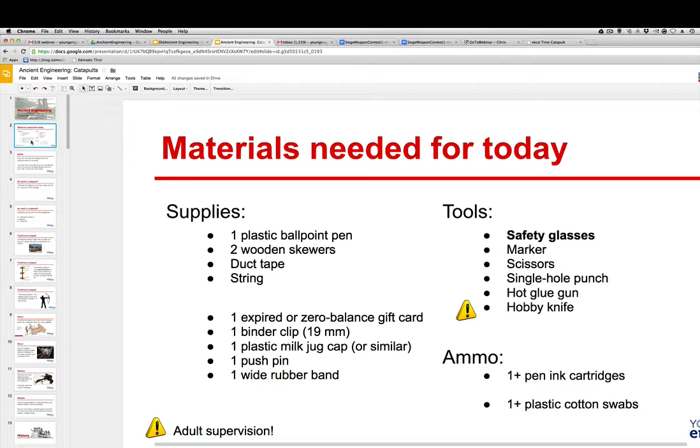If you don't have the materials from this slide right at this moment, don't worry. I will be putting out the PDF of this as well as you've got your book. You'll see different objects in there you might want to build. Okay? Now, we'll make sure this video is being copied. It's being copied right now as we copy our videos. And you should be all set at that point.

You can rewatch it. The goal of a catapult is to fling a mass in the air, mainly to inflict damage. That's what the goal of a catapult is. So we're going off this. I've got a question here. Let me see what the question is before we get started. Let me pull this up. Move that down here.

So we just build from the book? No, we don't just build from the book. You start with one from the book. We're going to look at fit and finish. That's the minimum you could do. What we really want to see you do is to improve it. Come up with something. Use better materials. Use lighter materials. Things that look better. All right? Then everybody's going to submit pictures of them, and then we'll see what you think. All right?

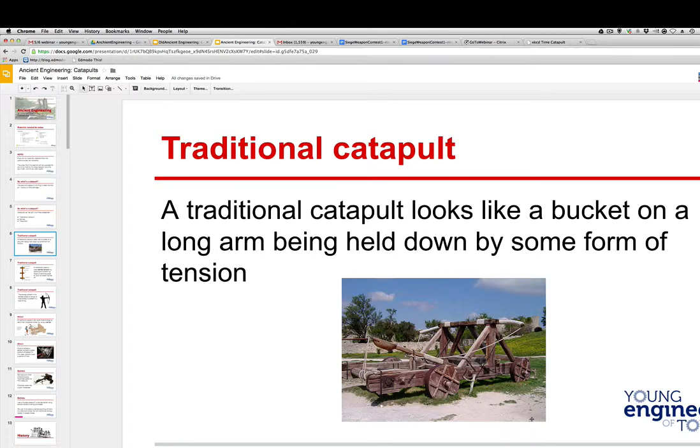So, catapults can be split into 3 categories: traditional catapult, ballista, trebuchet. A traditional catapult looks like a bucket on a long arm being held down by some form of tension. So that's what that bad boy looks like, right? Just like there. Okay? A traditional catapult uses stored tension by twisting and stretching ropes or bending wood to vault its mass into the air.

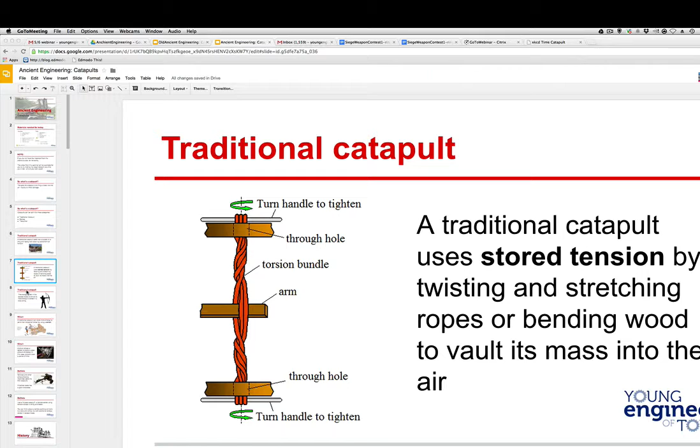Okay, so I'm just checking on IDs here. So here's the handle to tighten it. You've got this through hole. It's going through this hole. Your torsion bundle, it might be horsehair for that matter, and the arm that you're going to be launching off your catapult. And you're tightening it on both ends. But ultimately, it works a lot like a bow does. The energy stored in the twisted rope is similar to how energy is stored in a bowstring.

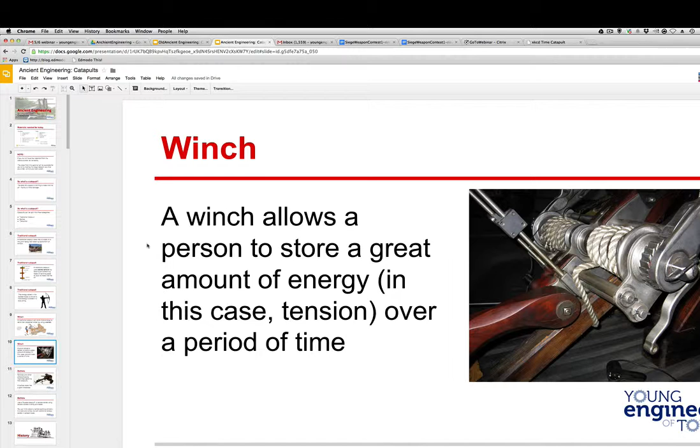Again, it works like a bow and arrow, but now, besides your arm muscles, we're using twisted rope. With the twisted rope, you are using your muscles. You've got to use your muscles to turn it right here, and you're going to store that energy. But now we're using a simple machine.

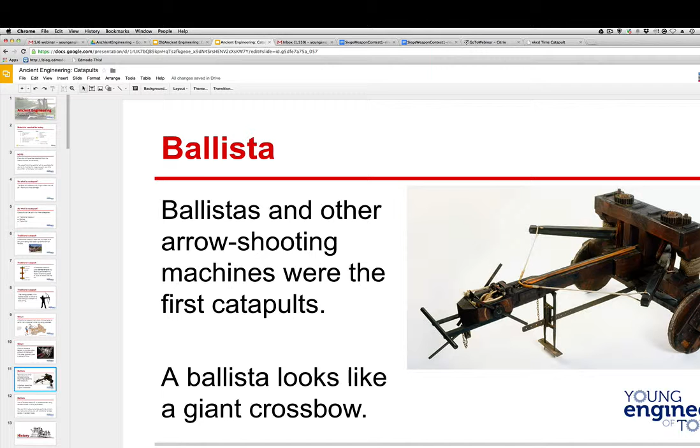On this bow, until we started making compound and all these crossbow things you see made today with levers and everything in them, you didn't have that. I was always surprised. I'd pull up my dad's crossbow, and it was amazingly hard to pull back. I never realized until I started having to do it. Okay. So, it's using those things.

So let's look at the history of this. Romans, here they go, ready to fire off. Humans have limitations. We can only lift so much, can only throw so high. By increasing the energy stored in projectiles, you can increase the amount of damage they will inflict. So what all that's saying is, if you take this projectile and you put a lot of potential energy in it, well, how can you do that?

Well, one, you can twist the ropes and build up elastic energy, or you can take it up higher and higher. Just think if I took a ball and I lifted it up 10 feet, dropped it on you, then 100 feet, and then 1,000 feet. You would see that you get more energy up to a point. Then after a while, the friction of the air starts slowing it down. It doesn't get any faster.

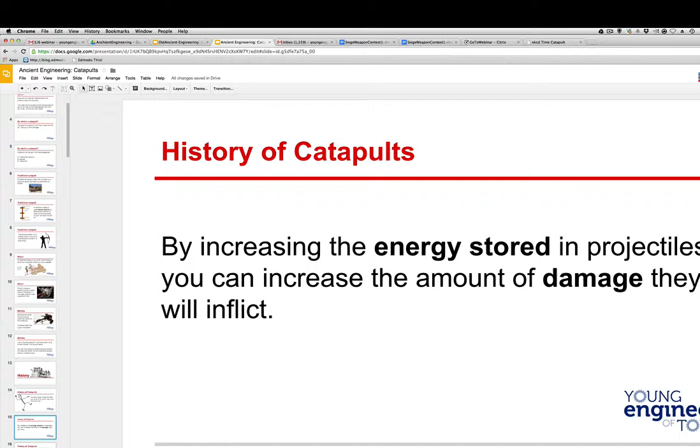So if you're a human being, you're throwing things at other human beings, but you can only throw it so high, so far. And so we're going to start adding equipment. Now, when it's military, we tend to spur it on even more. All right? We get more energy. The threat of your city being sacked and your family being harmed drives great military advances, which aren't always the greatest thing, folks.

But for example, if you look at the beginning of World War I and what the planes looked like, and by the end of World War I, it was a huge improvement in flight technology. Huge. It's enough so by the 1920s they're starting to investigate the jet engine.

All right. People we've got here. I'm checking my numbers. Okay, great.

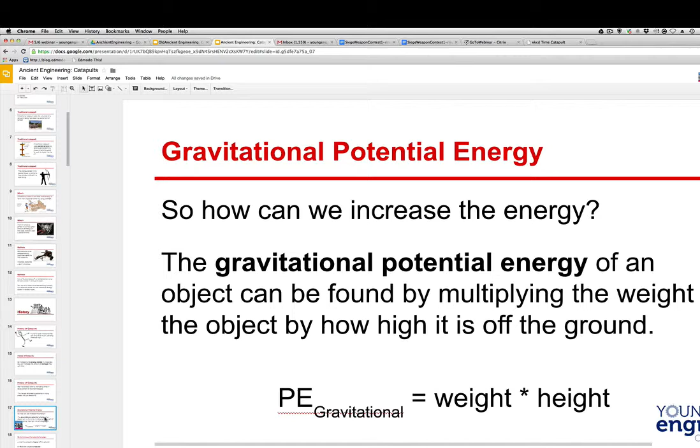So then, how can we increase this energy? Now, I don't care that you know this next formula, but gravitational potential energy basically says weight and height. That's a fancy way of saying you get more potential energy the higher up you have something and the heavier it weighs. Well, you get the projectile off the ground, make it heavier. I think if you take a half-ton truck and take it 2 miles off the ground, it's going to hit you. Make it a 10-ton truck, and wow, it's really going to hit you.

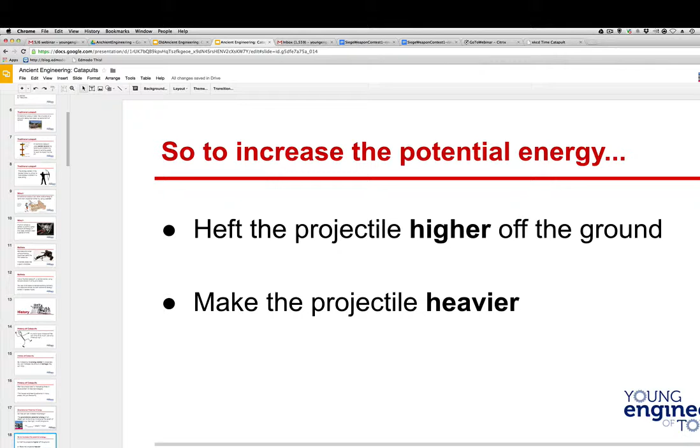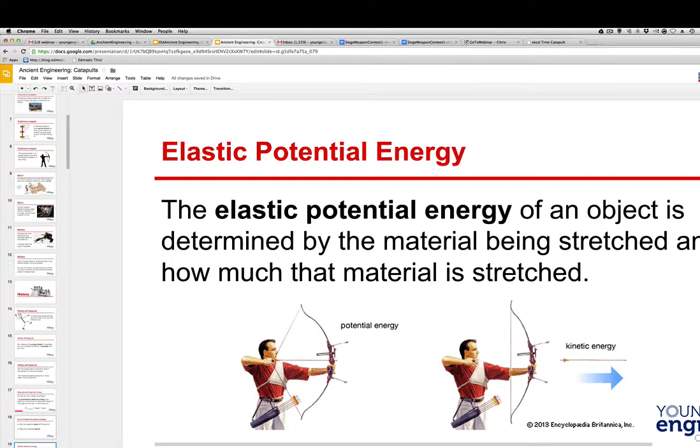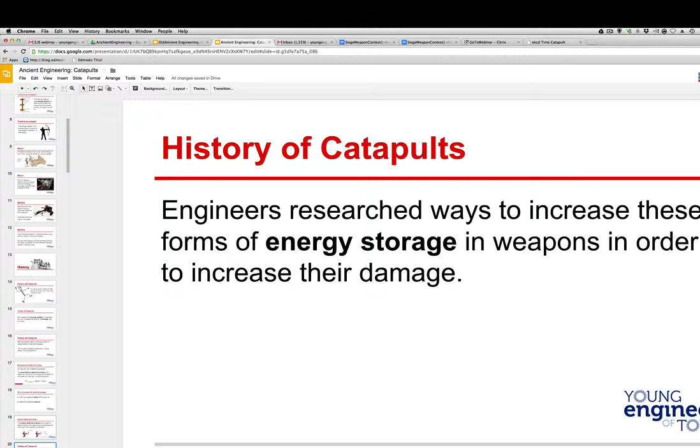All right, now on a bow and arrow, it's elastic potential energy. That's how much it's stretched. All right. Engineers research ways to increase the forms of energy storage in a weapon in order to increase their damage. So engineers researched ways to increase these. So what they did is they even put together a think tank.

A think tank is where, and we have them today, we get people that are pretty sharp in their fields. You put them all together and you say, okay, come up with a better way to make agriculture better in the United States. A better way for our economy to run. A better way to improve schools. A better way to design better weapons. They had this 400 years before Christ.

Put that in perspective. 400 years ago for us was the 1600s. We're just getting the first colonies in the United States. So let me restate that. That was 400 years before Christ when this was going on, so that was almost 2,500 years ago. But I just wanted to show you the time between when they had this think tank and when Christ was born was the same amount of time as since we were just forming colonies in this country. Sometimes it's hard, 200 BC, 100 BC. It sounds like a long time ago, but it is a big difference.

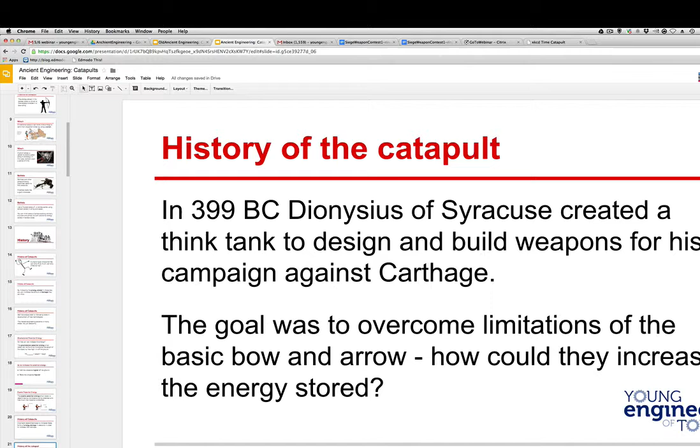All right. So they started thinking, well, what can we do to get better weapons? How can we make them stronger, more powerful? So let's look at potential energy and look at some of the things we can do. We're going to play this game.

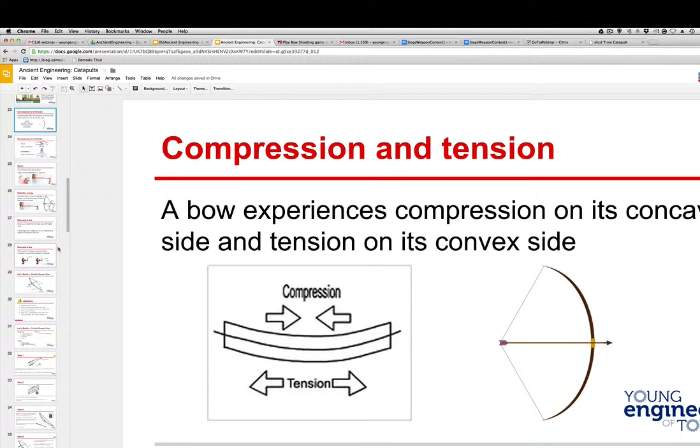So by now, I hope you're finding out pulling the bow back, that angle all matters. Which, by the way, they got very good at sighting these things in. But if you look at a bow, it's both compression and tension. The outer side of the bow is undergoing tension. This is like on a bridge, frankly. The inner side is going under compression. And you see it right here, compression, tension. Tension's a pull, compression's a push. And we're going to come back to that in a minute because we're going to reinforce this.

So how do these forces store energy? Well, imagine a loose rubber band versus a taut rubber band. You use your arm to pull that rubber band back. It's now storing that potential energy of you pulling it back. And same thing as when a bow is drawn, basically. All right? It's doing the same thing in both instances.

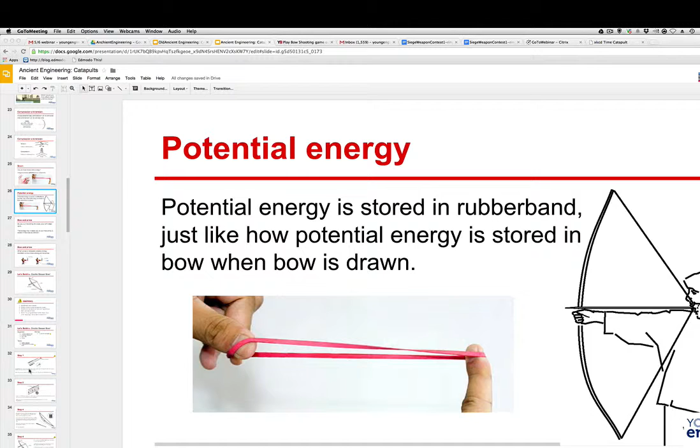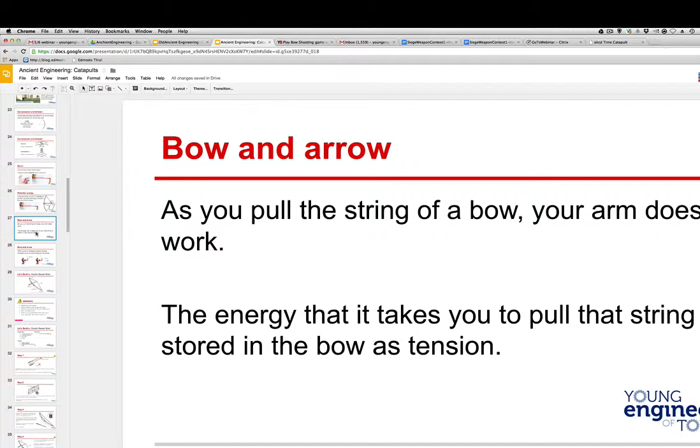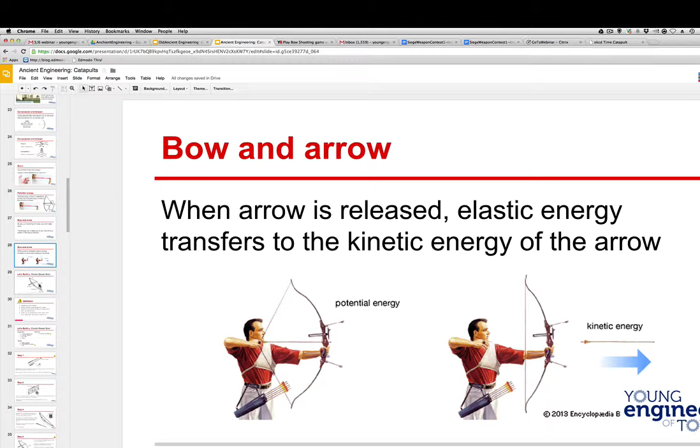So as you pull the string of a bow, your arm does the work. The energy it takes you to pull that string is stored in the bow as tension. So all that energy from your muscles goes into the bow as tension. So that elastic energy that you transferred by pulling back is, when you let go of the bow, transferred as kinetic energy into the arrow. And there it is.

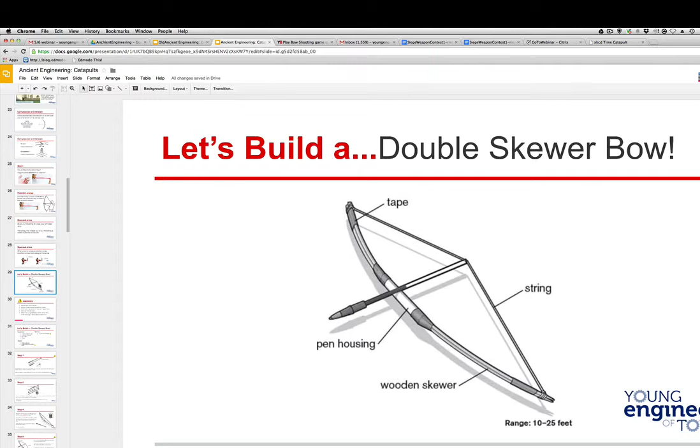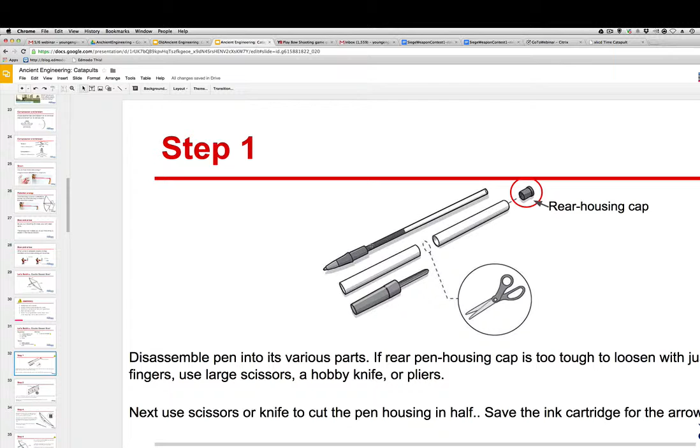Now make sure you always wear eye protection when you're doing this, all right? So one you can build right now, I'll show you, is this bow and arrow. You can take a pen, cut it in half, and this is going to be part of your arrow. This is really just for reinforcement. And then you're going to put the pen casings over some wooden skewers. Be very careful. Do not shoot this at cats. Do not shoot this at your little sister. All right? Could hurt somebody.

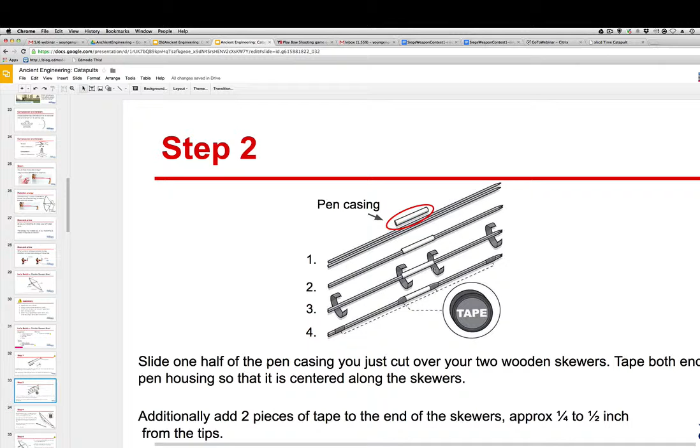Then tape it around like this. So this is going to make part of your bow. And watch. Then you're going to bend it like this. And then this will be an arrow. You can use a rubber band here too.

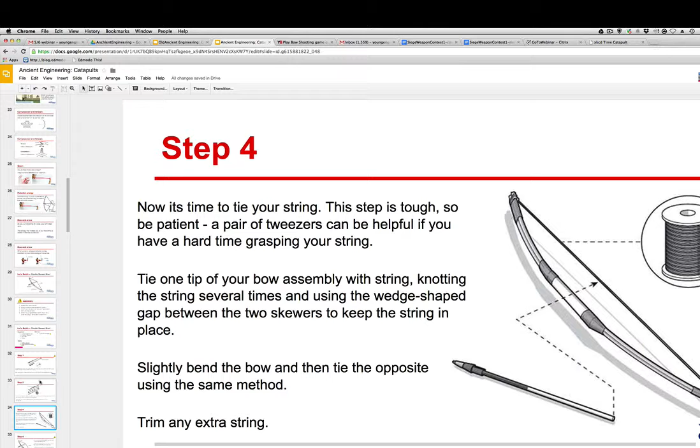All right? And then it's going to look like that ink cartridge. You're going to have to build it just like that. You know, and be careful, those ink cartridges have been known to break. All right.

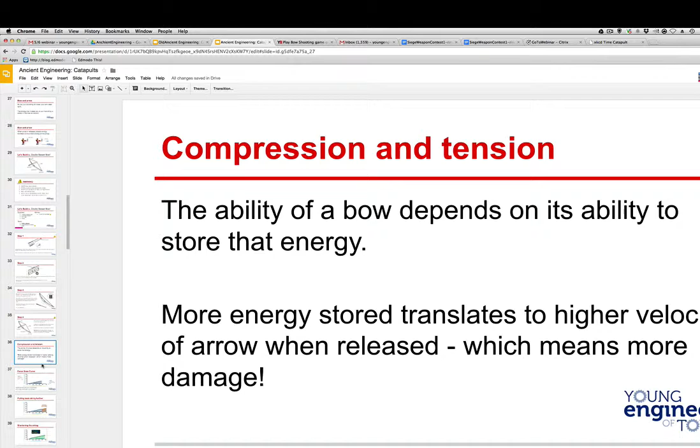The more energy you can store in that bow, the more powerful the bow can be. All right? So let's look at the elastic energy in this bow. It goes from 0 to, say, 30 right here. Okay? Now, the x-axis is how far you pulled the bow back. The y-axis is how hard you pulled it. Okay? This is how much force your arm is exerting. This is how much elastic energy you store.

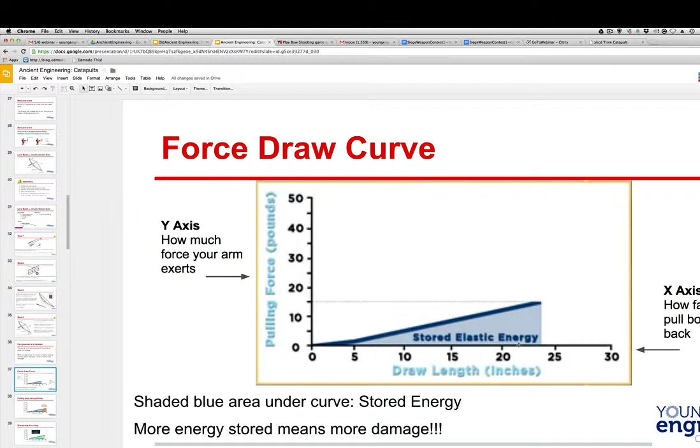Watch when you just pull a little bit farther. By just moving a few more inches, you get a lot more energy. That final few inches is huge. We see that with model airplanes. If you wind up the motor on a rubber model airplane, the rubber will break at a point. So let's say that breaking point on average is 400 winds.

You would find that most of the final 20%, 20% of 400 would be 80 winds. So from 320 winds to 400 winds of break is when you get all your thrust. If you really wind it up that hard, it's going to go way up high real quick. Not long, but it's going to get a lot of thrust in this last little bit here.

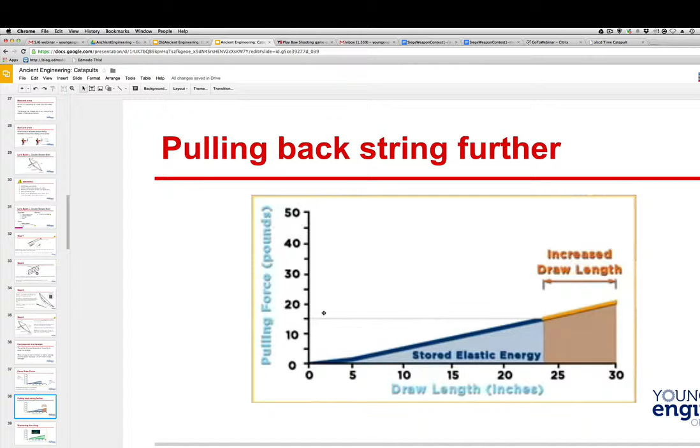That's why with a rubber model airplane, if you ever let one go and fly it, if you fly just a few feet and it crashes, then you pick it up and try to throw it again, they don't usually ever fly very well because you've lost a lot of that final 20%, all that thrust.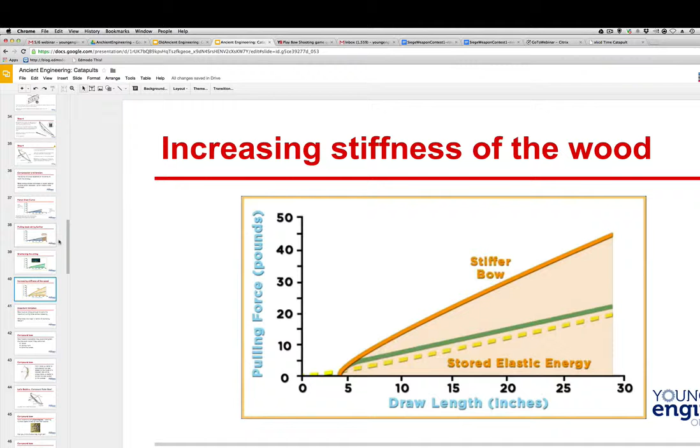Now, again, you also have to be pretty strong. Back in the day, bowmen had to be very strong to be able to pull that bow back. You had to be strong enough to pull it back and be able to breathe and release it. The bow must be strong enough to carry the maximum pulling force without breaking. So what can we do to do that? Well, pretty soon, if you just had a piece of wood, it would break.

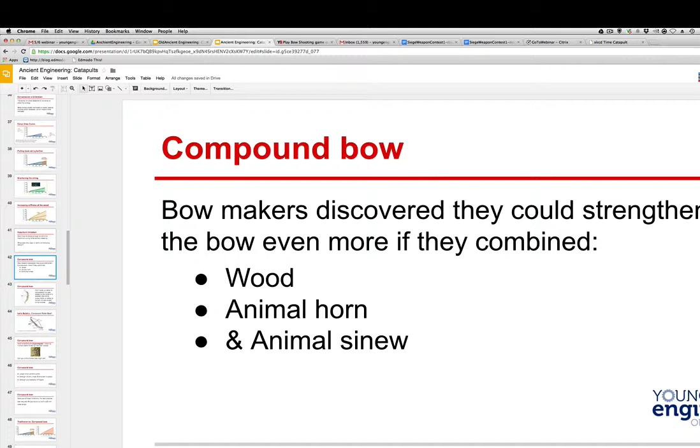So they would take wood, animal horn, and animal sinew, which is, think of that as the tendons, the connective tissue in an animal. And what they would do is put the three things in here. Here's part of the horn on the inside. Here's the wood of the bow. And here's the sinew on the outside. So those three things together allowed the bow to be bent, more energy could be put in the bow. You could pull it harder, hold it longer. And it made a big difference.

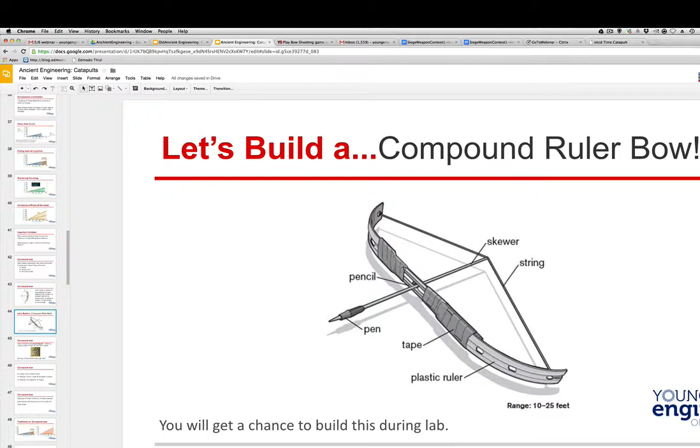And so here's another example of a bow. You can use a compound ruler bow made of multiple materials. It's using a plastic ruler and tape, and you might get a chance to build that in lab. Now, the limits are physiological. In other words, the bows were no longer breaking. So the bows could handle you pulling it. Problem is your archers couldn't pull them anymore.

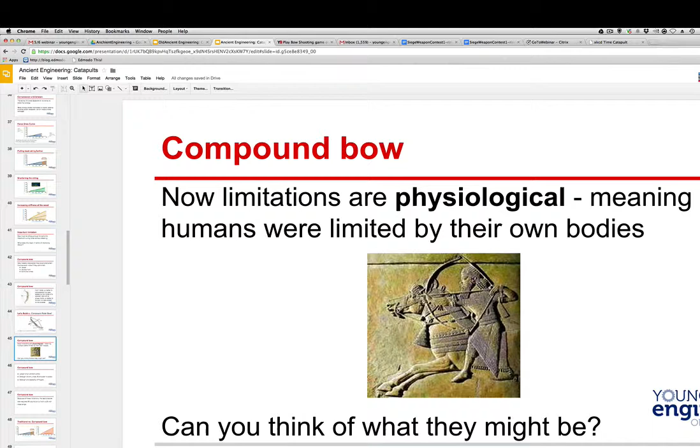All right? And that was limited by the length of the archer's arms, their upper body strength, and the strength and dexterity of their fingers. That's why generally most bowmen are males, because males, generally, there are plenty of exceptions, have more upper body strength.

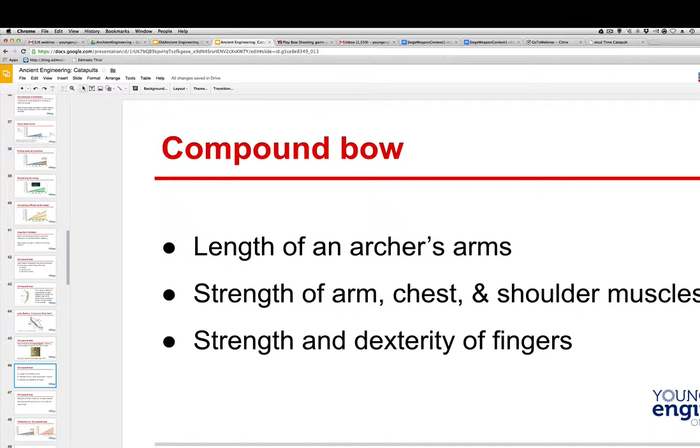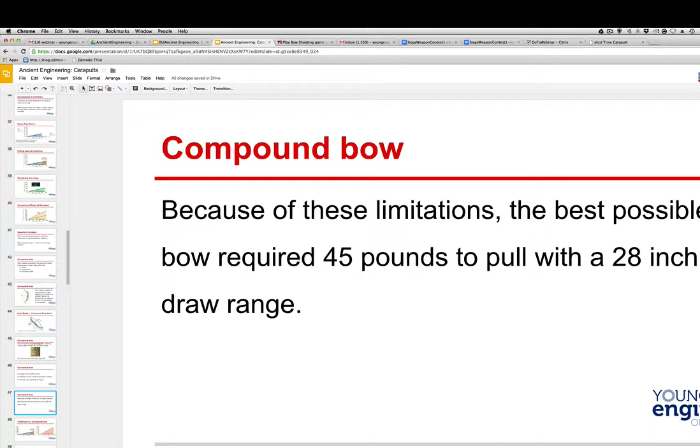There's plenty of women that have the upper body strength to shoot bows, or women archers that compete at that level, the whole nine yards. But I'm saying back 1,000 years ago, it wasn't so much. All right, because of these limitations, the best bow required 45 pounds to pull with a 28-inch draw length. So that's like 2 feet, 2 3/4 feet, 45 pounds. And you really could get a lot of...

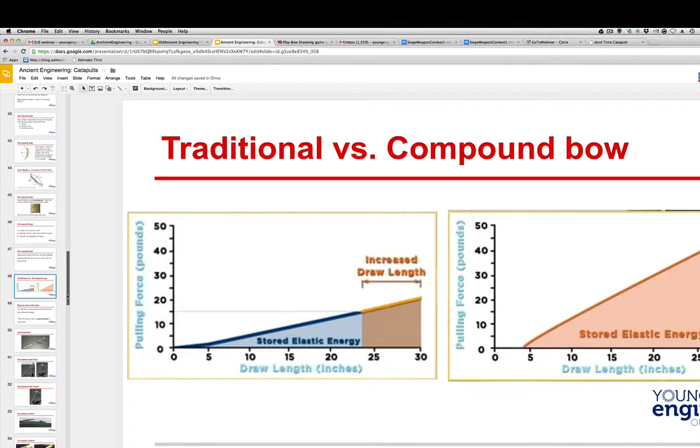So then comes the fact, okay, we've made our bows out of multiple parts that won't break, can store all this energy, but we can hardly pull it ourselves anymore. So what they did is they developed the gastrophetes, or belly bow. We saw a little video of that last week, remember? So this bow goes like here, and you use this to shove the arrow into it. We'll show you in a second.

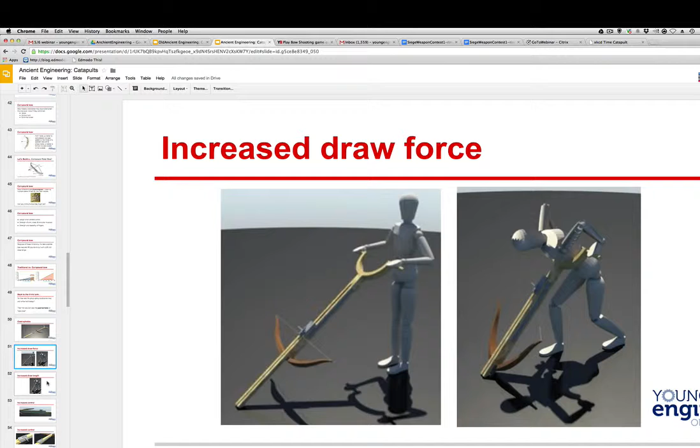So there's the guy, he puts it on his waist, and there's the front of the bow. Let's go back. This part here and this part. He uses his body to cock it, shoves this into it, and locks it down. See how it is right there? And forces it back on that. And then once they were set there, you drop the arrow in there. See, the arrow goes right into here. And now you're ready to launch this bad boy.

And by having this iron mechanism too, if it's getting so powerful, so much energy, your hand really can't hold it. By having that iron mechanism, you can precisely launch it right when you want it. Okay?

Now I've gone pretty far here. Any questions on what we've covered so far? Sorry about that. Okay, and everybody's talking about how much they were shooting it. Great. But any questions on what we just did? Raise your hand if you have a question. Okay. All right, let's go on to the next one.

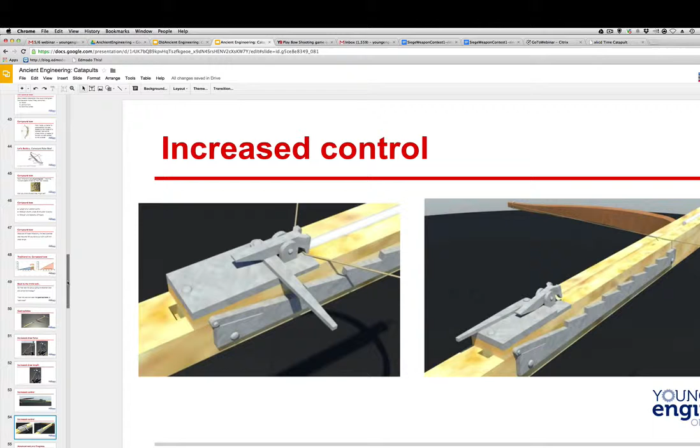So, what did they do to make the gastrophetes better? Well, they made it bigger, of course. And the next advancement starts leading us to our first true catapult. Notice this catapult isn't like the medieval one. They're definitely using arrows here. Now they're using, look at this, they're making levers. Remember how simple machines, when we put them together, make complicated machines. So you're starting to get into a set of levers that you put in here.

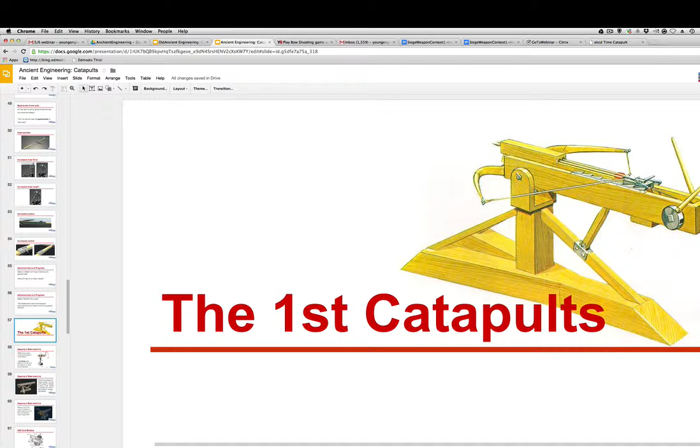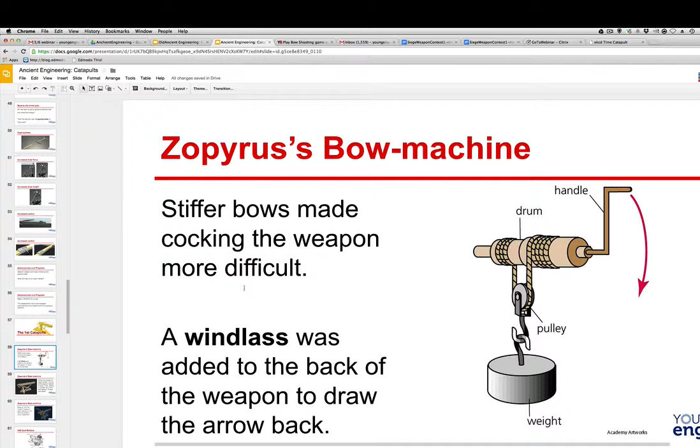The person pulls it down, sticks the lever back in, pulls it down, because he's putting the leverage of his body on it right there, or her body. And they also would use windlasses like this, that would have a pulley, and again, this is a handle, so think of a wheel and axle. A lot of leverage on that wheel and axle. So it allows you to put a lot of force on it. So it'd be something like this.

Of course, here's the problem you run into with this stuff. Okay, now you've got all this energy into the system. You've got it so it doesn't break. Well, now we'll launch big arrows, because remember we said the mass and everything? Well, now I can't even lift it. And I certainly can't hold it still enough to shoot it. So now I've got to put it on a platform. I've got to put it on a base.

So the trade-off, of course, here is a massive weapon. If it hits somebody, it takes down a guy on horseback. It hits the horse, knocks the horse on its side. The problem is, though, it gets to be unwieldy, where a regular bowman can launch 3 or 4 arrows at this. So their strategy is, well, we have to be able to launch at such a great distance that you can't hit us with your regular bowmen. And we certainly aren't going to let armed soldiers get to us.

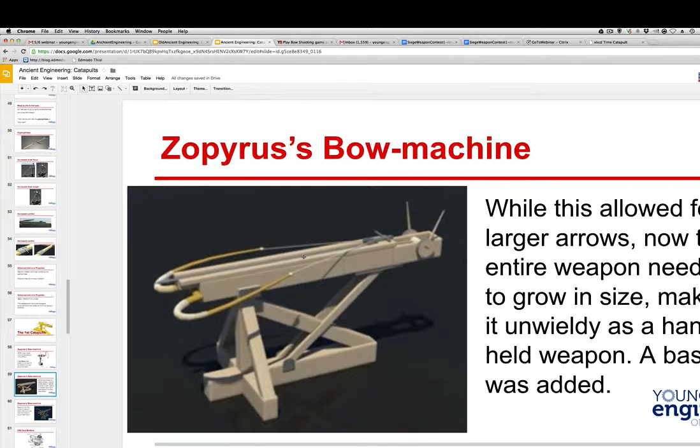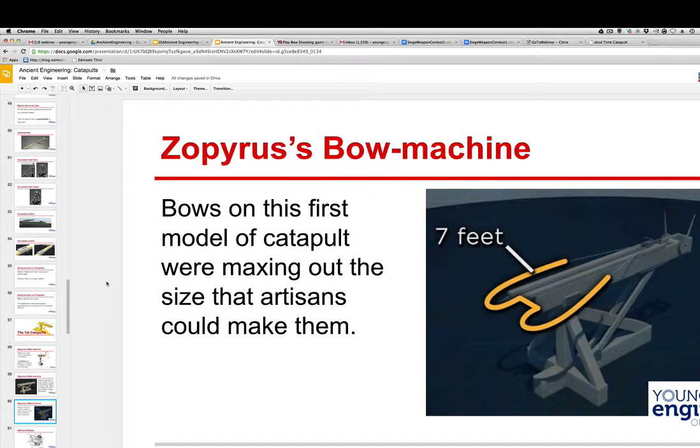You know, and then you start getting into how big of a bow can you make that will fly in there. Maybe we need to start flinging other things. So here's another cool one. Uses rubber band, push pin. You're going to cut up an old debit card or gift card. Make sure you never launch this at people. You're wearing eye protection. You know, don't hit your little brother or sister with it. That's not cool. All right.

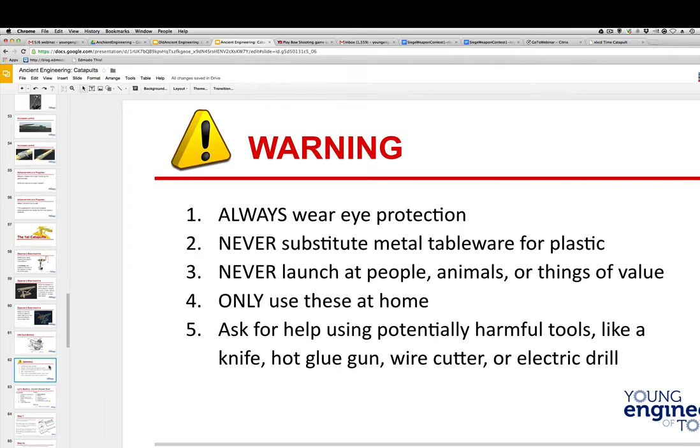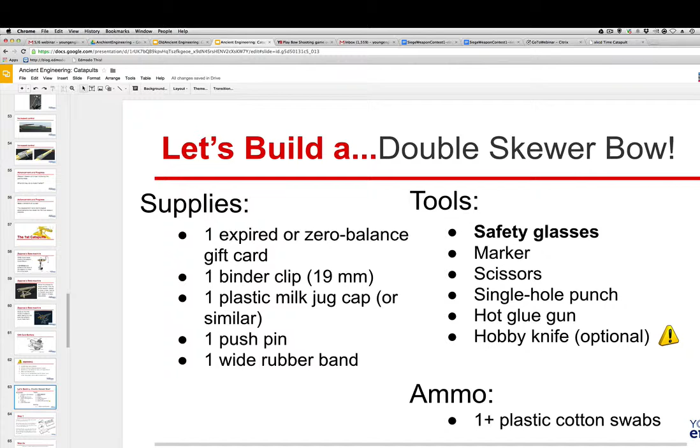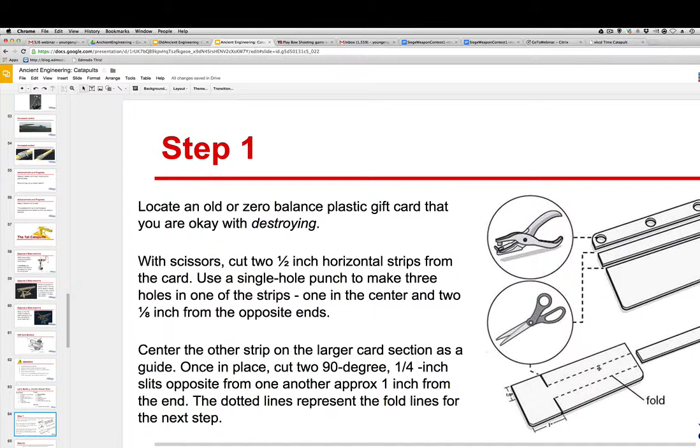So, if you have an old gift card, one that's expired, one that has no balance, because we cut this up, there's no getting money back. All right, so you don't want to do that. You're going to use a hole punch to cut 3 hole punches there, then this plate, right, which is going to allow us, on taking this plate, putting it on the center to make this.

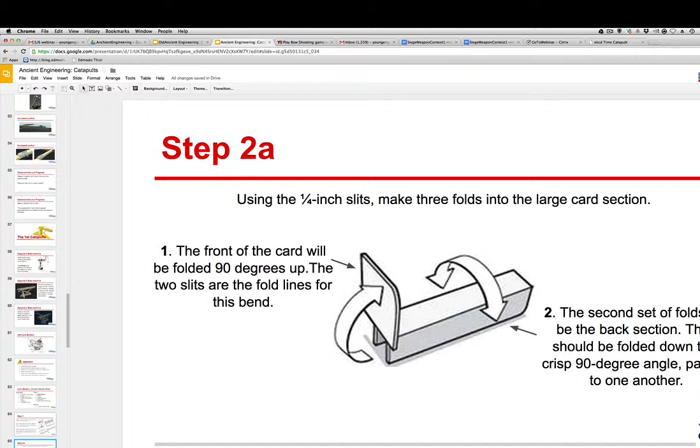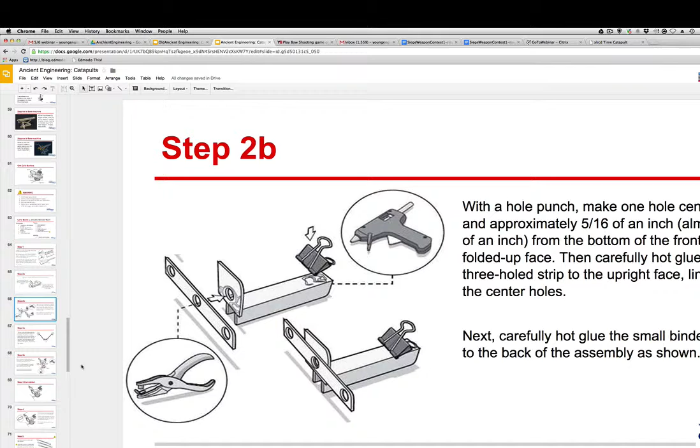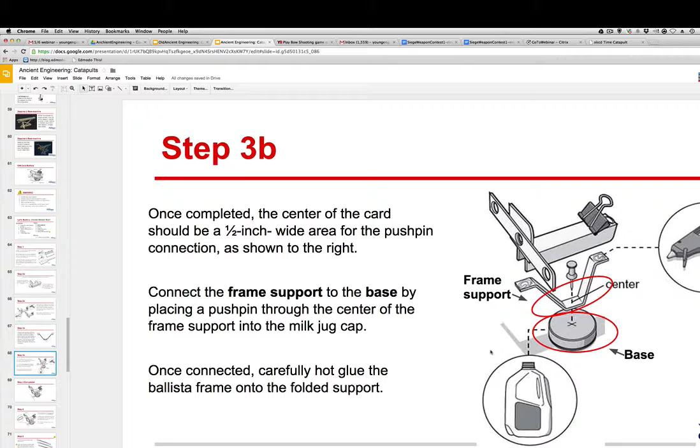First thing is to pull this tab up 90 degrees. And then fold these sides over. Get that in, and you punch a hole here. Put that paper clip on, just your hot glue gun, that paper clip right there. You know, that final 1/4 inch strip, we're going to use those pieces to make a place for the stand on. So that's going to be your base, support base for this bad boy. Getting the hot glue gun again. Going to look something like this.

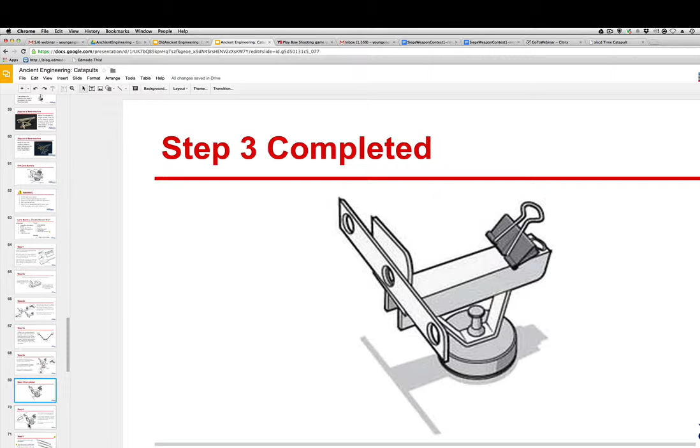Any questions? All right. Now, this we're using a rubber bowstring again. This is non-traditional. Cut open a wide rubber band and then tie both ends of the rubber band to the opposite ends of the bows, using outer holes as a tie down. Okay? And you don't want a lot of slack when you build that. And they didn't use a lot of rubber bands. All right.

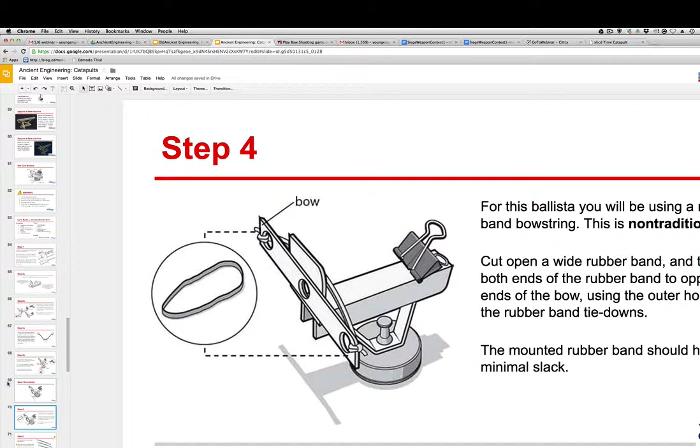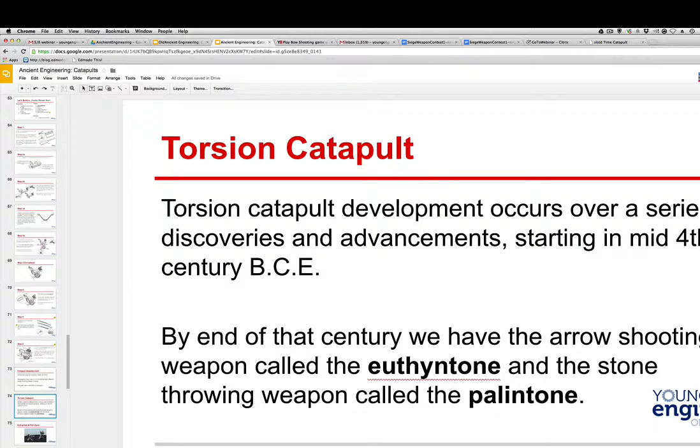They keep going there. Now we start working on torsion catapults, starting mid 4th century BC. Now think about that. 4 centuries before them, they're making these. You have the euthytone, which I'm saying terribly, and palintone. And I am so sorry that sounds that bad. The first is an arrow, the other one throws rocks. They start to realize it doesn't have to be piercing. That rock has so much energy. When it drops on something, it'll hurt anything. All right? And so there they are.

Here's some examples. Some of these things were 45 feet in length. They were huge. You can imagine in a time when you're looking out, you're feeling pretty good about your fortress, and you see them pull up a weapon that is 45 feet long, that can outshoot any of your arrows. It basically can ping away at you.

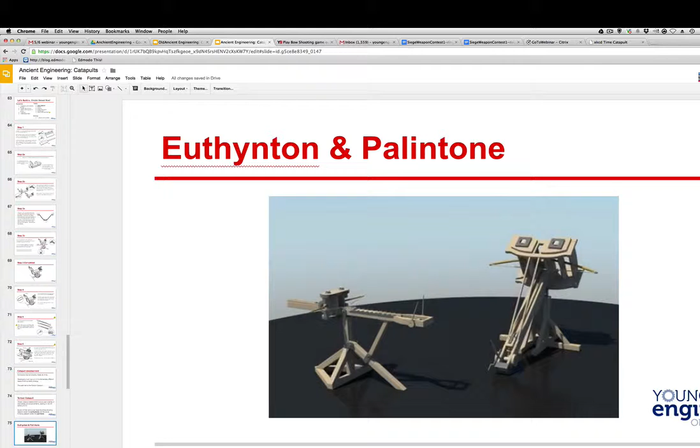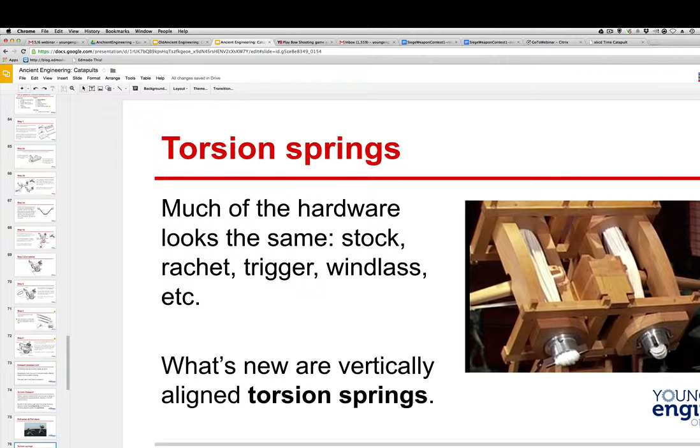Much of the hardware looks the same. Got ratchet, triggers, all the things we've been doing, but now they're going to start doing springs in this. See right there, they've got the ends here and here. You'll see what I mean. We're going to twist it now. All right? And that's torsion force.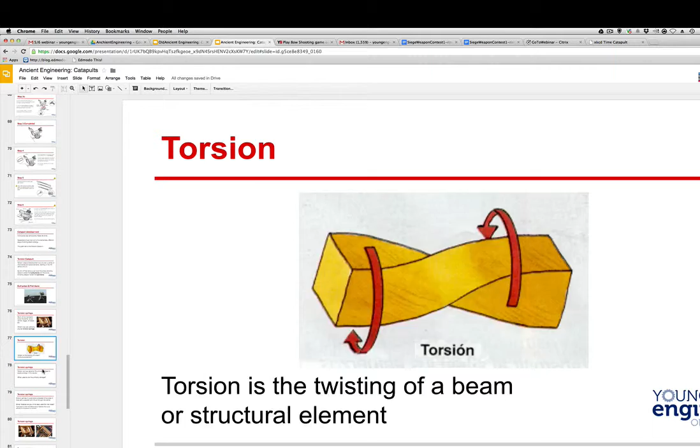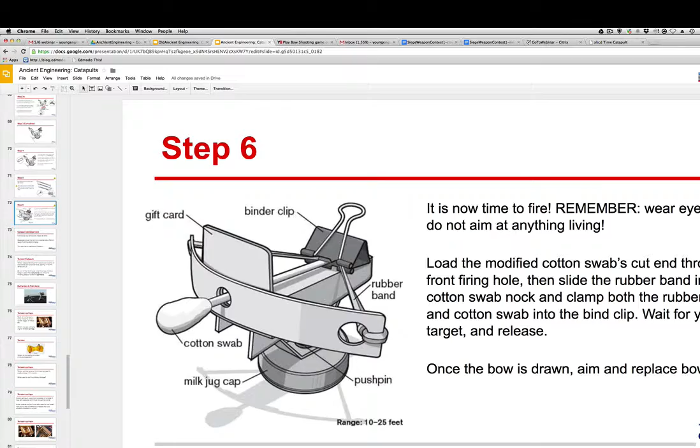And if you think about it, before, it would be your arm that was the primary storage for elastic energy when you pulled it. And now we're twisting things. All right. And some of them were bundles of rope with wooden arms thrust through the center. And so you want things that can handle tension like this, right? So, pardon me. So we're at this point again.

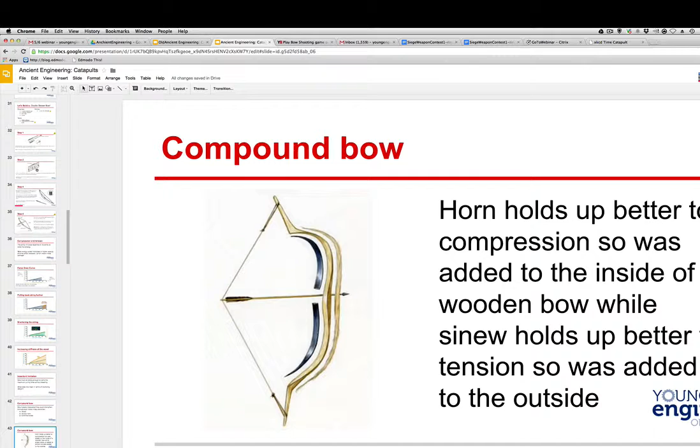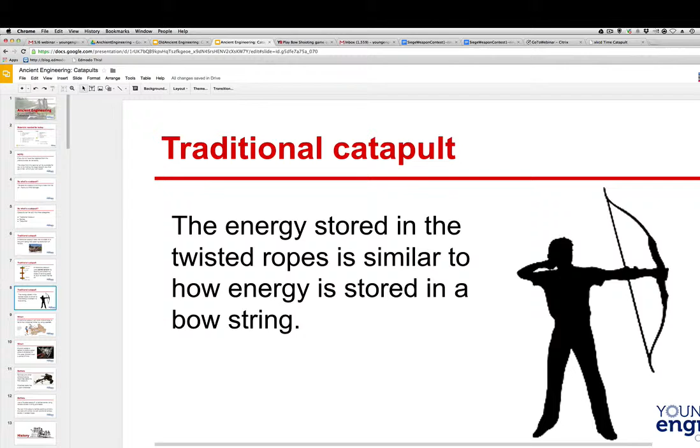Up to here, it's you, the bow person, that's doing it, right? So that's your arms using a bow. But with a catapult now, this kind, you're using simple machines to help you twist that torsion arm. All right, before it was your arm, now we're using simple machines.

But the machine gets so big, you got to drag it around. So there's constant trade-offs. So if I see you pulling up with one of these early catapults, I might send my guys out to attack you immediately. Does that make sense? Any questions about that?

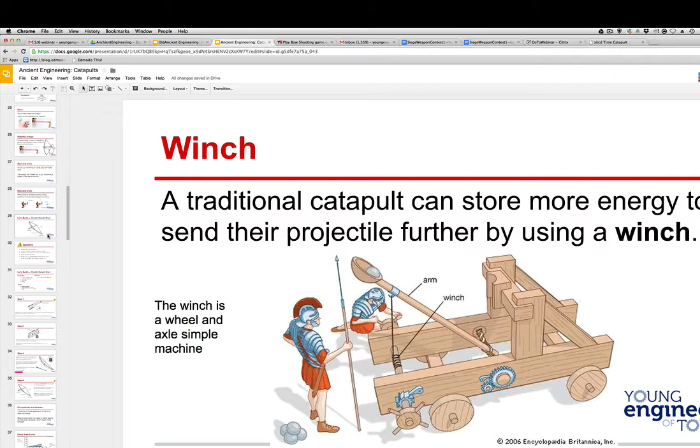I'm sorry, I feel like I'm doing a lot of talking on these. Don't worry, in the weeks upcoming, you're going to be making things. All right, here we go. I'm going really fast.

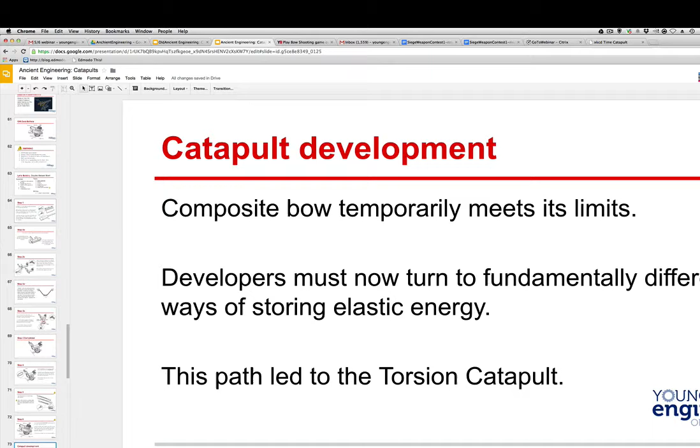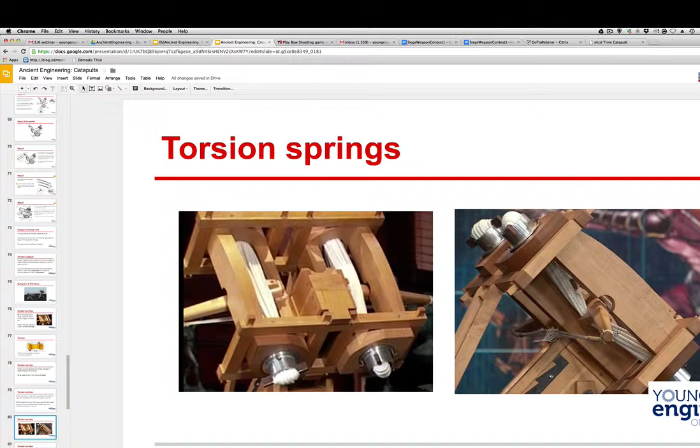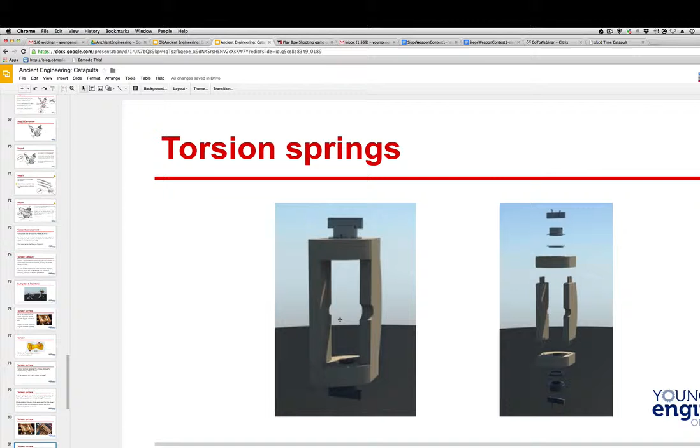All right, so now again, you're taking these ropes and you're twisting them, tightening it up. And there's the bow right here. These are the arms of the bow, like in a bow and arrow. You can see it, there's another view. And they use the sinew. They use things like connective tissue that can handle tension really well. They didn't use rocks. That wouldn't have been very good for them.

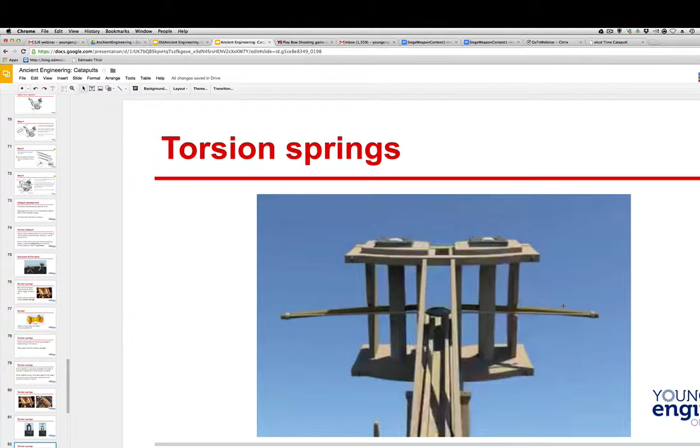And so here they start to make it. The bow is sitting right here, folks. They've literally taken the bow and set it on its side. And then they're pulling this in such a way that this whole thing's going to come back. All right, watch this.